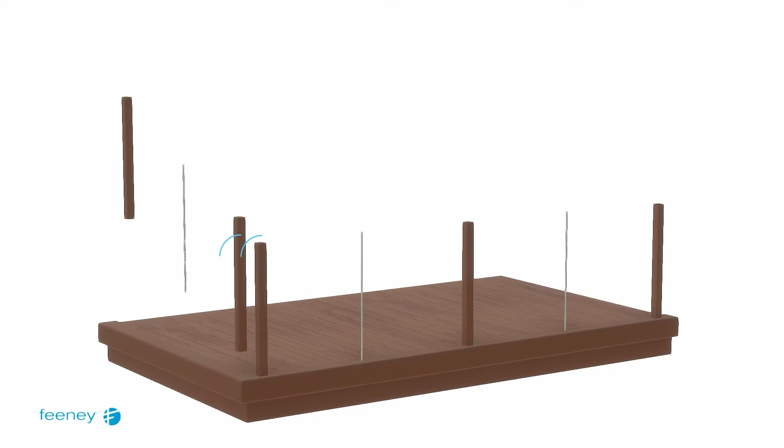In this video, we will walk you through the installation of Feeney CableRail Conceal Kits in a wood railing frame. Conceal Kits offer a sleeker, lower-profile alternative to our original CableRail kits. Here we have an L-shaped wood railing frame with double corner posts, wood intermediate posts, and Feeney stainless steel pickets.

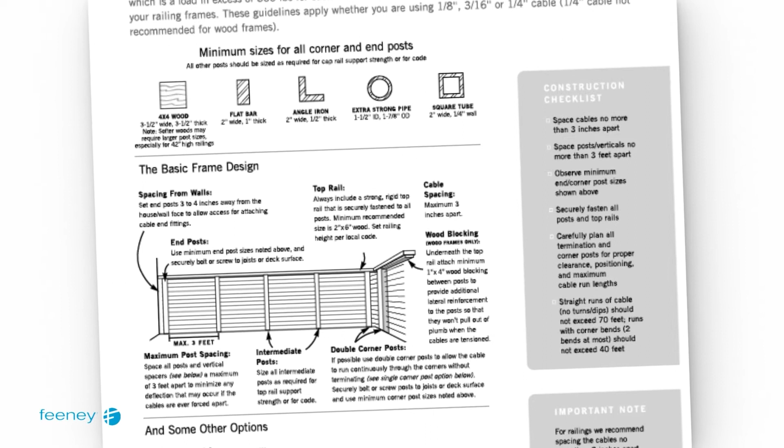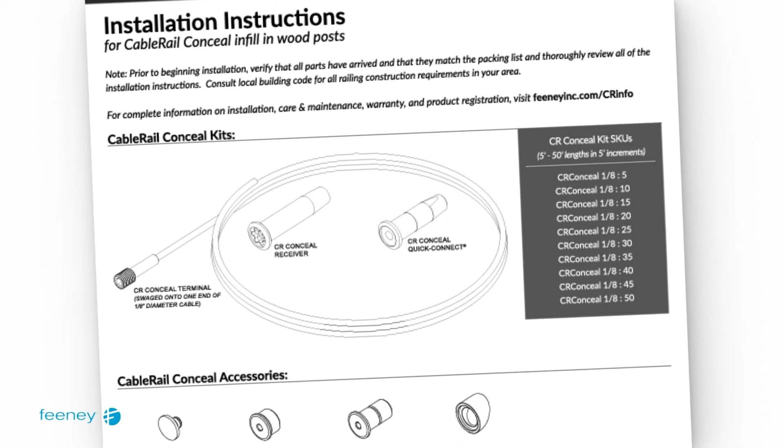Be sure to follow the recommendations on our website to ensure your frame is strong enough to withstand the tension loads of cable rail infill. Be sure to consult local building codes for all railing construction requirements in your area. Prior to beginning installation, verify that you have all the required conceal kits for your installation. Thoroughly review the conceal installation instructions before you start.

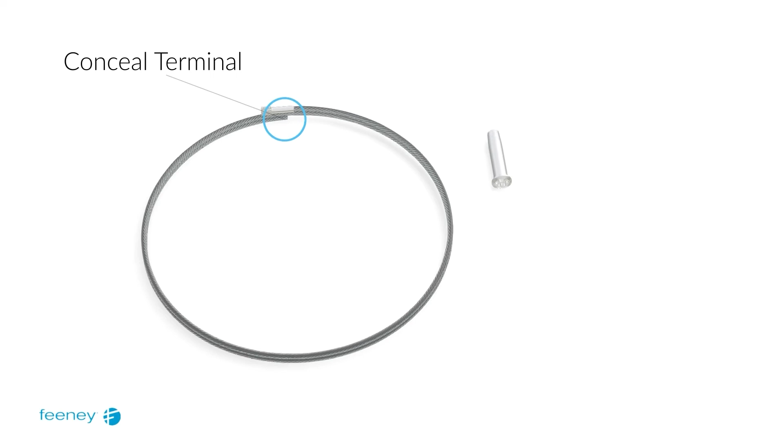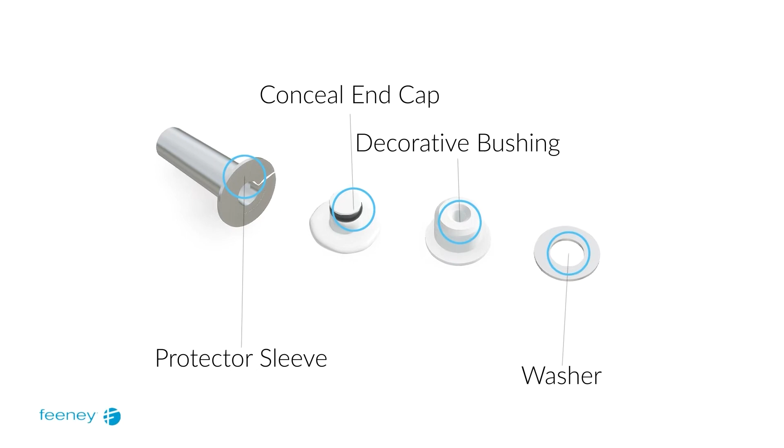Each CableRail conceal assembly includes a length of 1/8 inch diameter cable with a conceal terminal pre-attached to one end. The kit also includes a conceal receiver and a quick connect conceal fitting. You will also need stainless steel flat washers. Conceal end caps and decorative bushings are optional accessories. Your order may also include isolation bushings if your project is in a harsh environment.

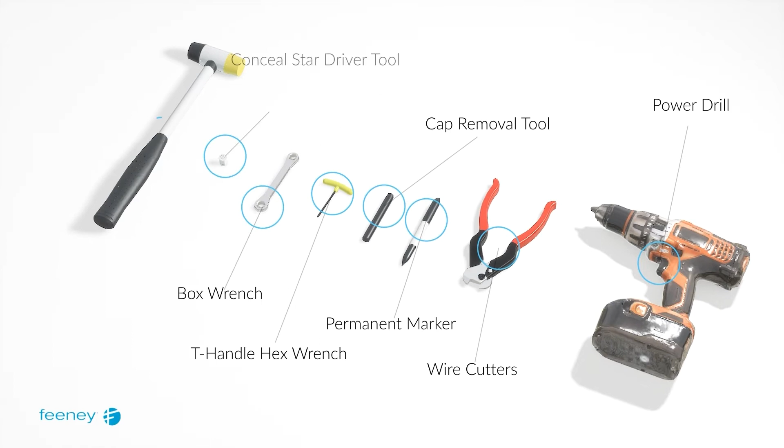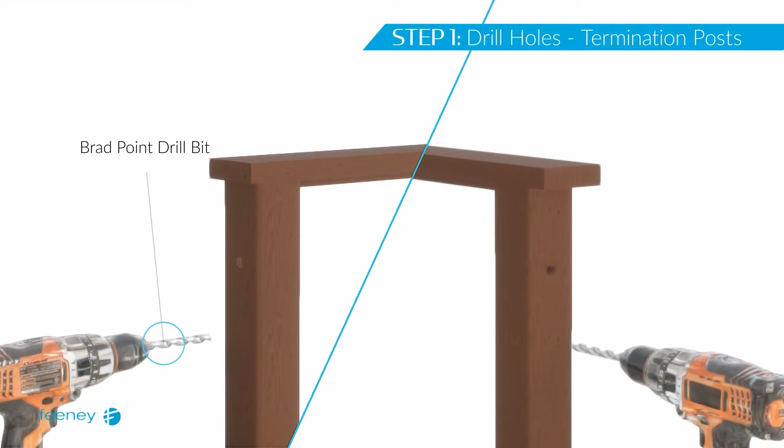You will need the following tools for your installation. Please note the conceal star driver tool shown has been specially designed for CableRail conceal installation. Drill 29/64 inch holes through both termination posts using a brad point drill bit. You can prevent tear out by drilling from both sides.

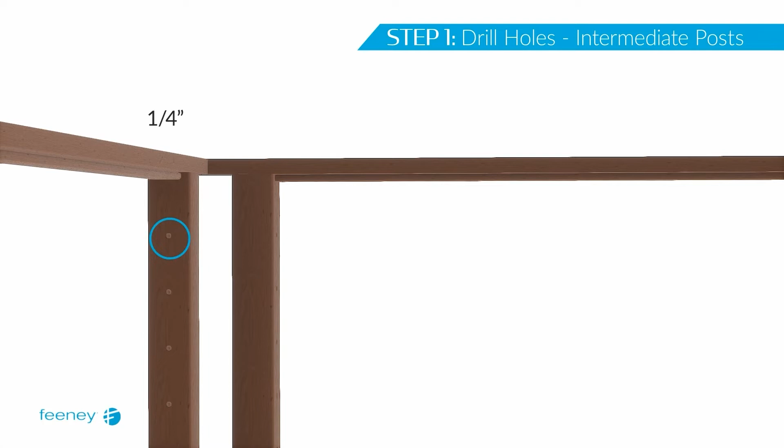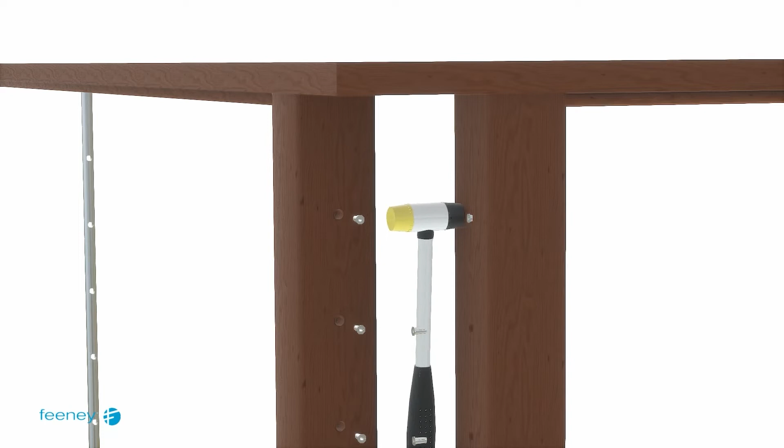Drill 1/4 inch diameter holes in the intermediate posts and 1/4 inch holes in the corner posts for protector sleeves. Feeney intermediate pickets come pre-drilled. If you are using protector sleeves, insert them into all holes now and tap them in with a mallet. If you are using decorative bushings, insert them into the holes on the inside face of termination post B. The decorative bushings for post A will be inserted later in the next step.

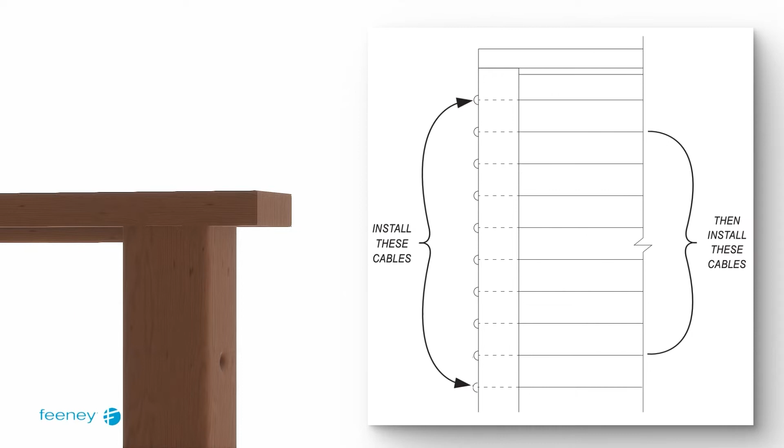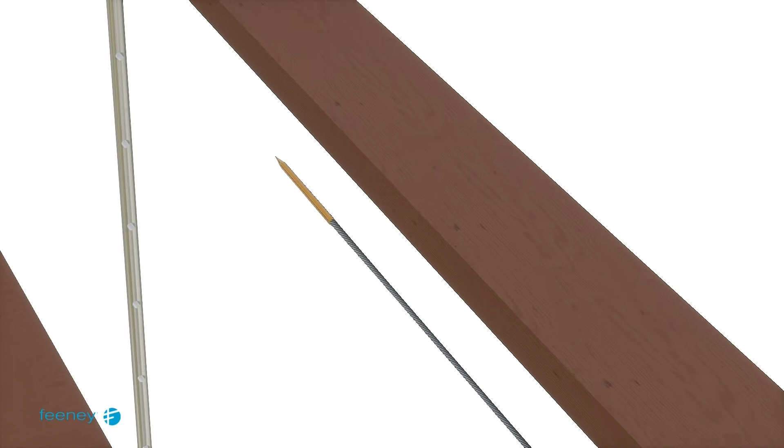Start by performing steps 2 through 12 for the top and bottom cables only. Once completed, repeat steps 2 through 12 for the remaining cables. This is required to preload the frame and ensures adequate take-up for all cable assemblies. Lace the free end of the cable through termination post A. If you are using decorative bushings, thread one onto the cable before continuing through the intermediate posts and pickets. We recommend using a Feeney cable lacing needle.

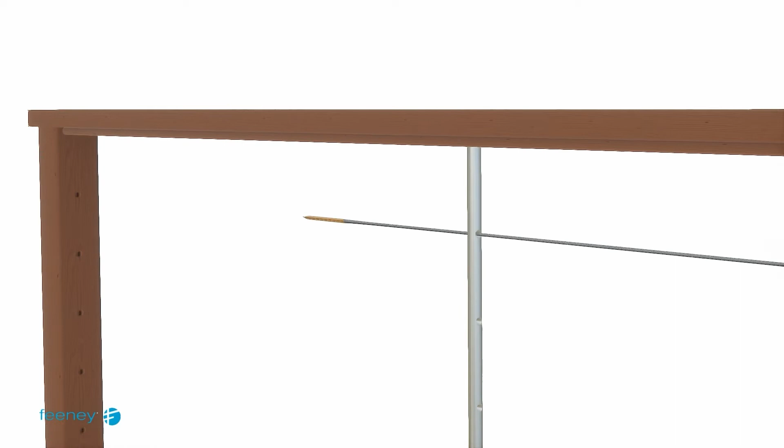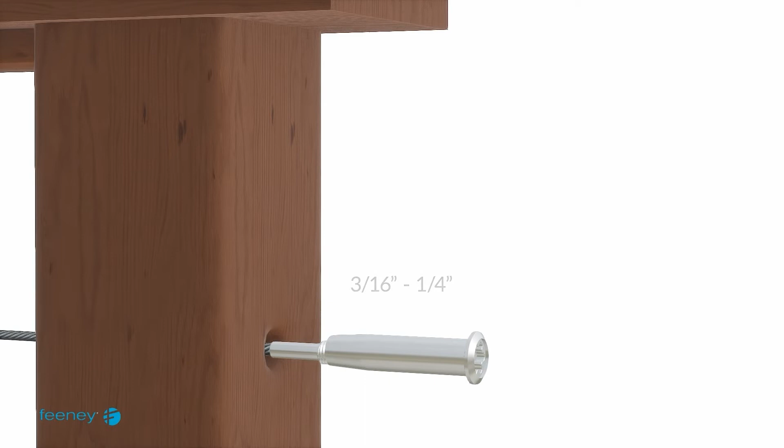Finish by lacing the cable through termination post B. Leave the conceal terminal exposed at one end. Thread the conceal receiver onto the conceal terminal, leaving approximately 3/16 of an inch of threads exposed. For cable runs over 40 feet, leave approximately 1/4 inch of threads exposed. Push the conceal receiver fully into termination post A.

Pull the cable tight through termination post B to remove slack in the cable. Mark the cable on the outside face of termination post B using a felt tip marker. Pull the conceal receiver through termination post A and unthread it from the conceal terminal. Use cable cutters to trim the other end of the cable at the mark made in the previous step. Reinsert the free end of the cable through termination post B, allowing 6 to 8 inches to protrude.

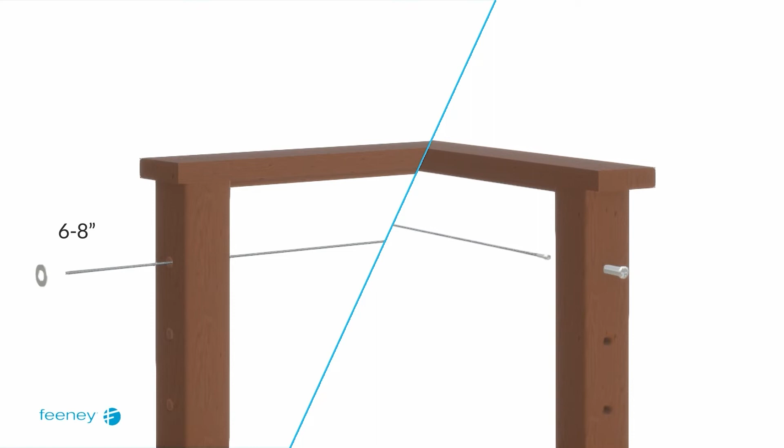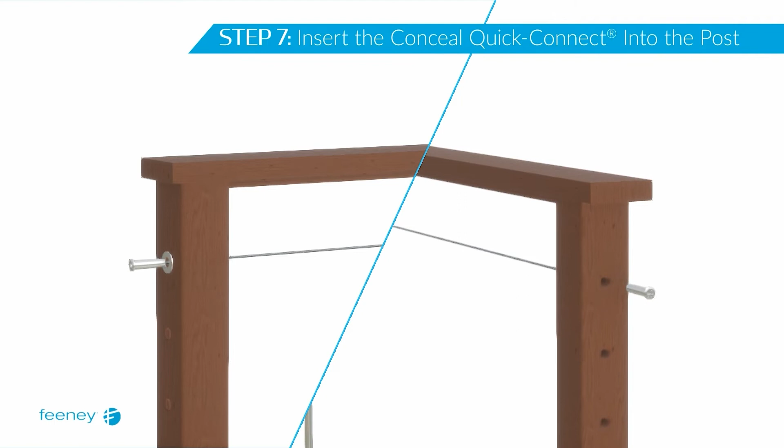Put a flat washer on over the end of the cable. Insert the free end of the cable at termination post B as far as it will go into the conceal quick connect fitting. Pull the cable assembly so that the conceal quick connect fitting slides back into termination post B and reinsert the conceal terminal into termination post A. Since the cable was trimmed, the conceal terminal will only insert partway into the post.

Slide a flat washer onto the conceal receiver and insert the receiver into termination post A, turning it clockwise to engage the threads on the conceal terminal inside the post. Continue threading the conceal receiver onto the conceal terminal until the receiver is up against the face of the post. You won't be able to see the fittings as you do this, so be careful to stop if you feel resistance to avoid cross-threading.

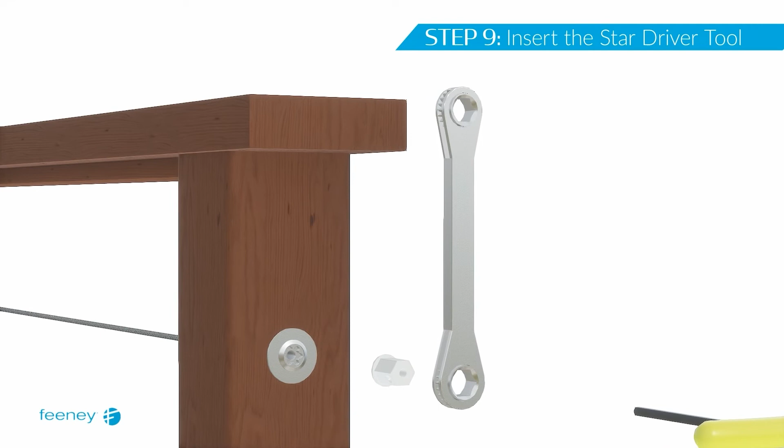We are now ready to begin tensioning the cables with the special CableRail Conceal tools. Insert the Conceal Star Driver tool into a 9/16 inch end on a ratcheting box wrench. Insert the T-handle hex wrench through the hole in the Conceal Star Driver tool and the conceal terminal. Engage the T-handle hex wrench into the mating hex end of the conceal terminal. Then align and fully seat the Conceal Star Driver tool into the star pattern on the conceal receiver.

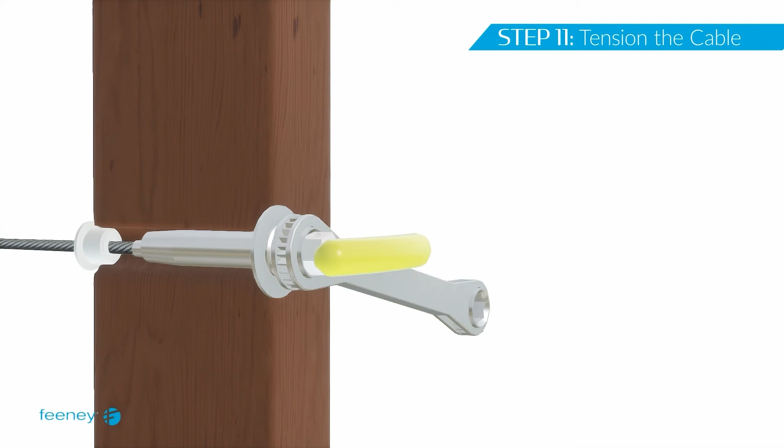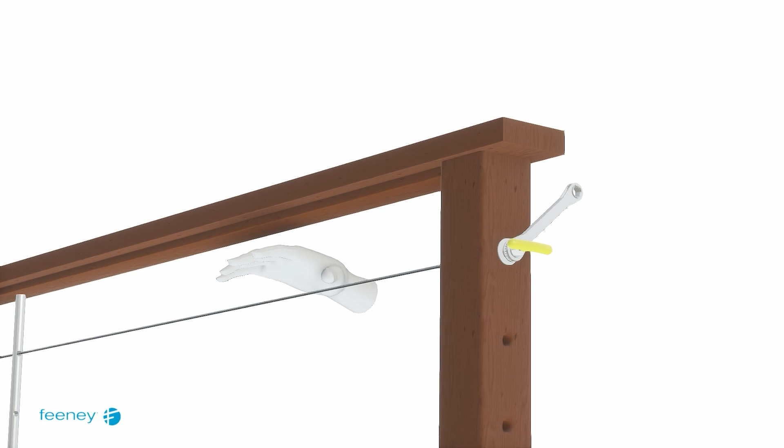Tension the cable by slowly rotating the ratcheting box wrench clockwise while holding the T-handle hex wrench in a fixed position. After the slack in the cable has been removed by initial tensioning on all cables, swiftly hit each cable line with your palm several times to ensure that the jaws and the quick connect are securely seated. Continue tensioning each cable until the desired tension is reached, but take care to avoid over-tensioning the cables.

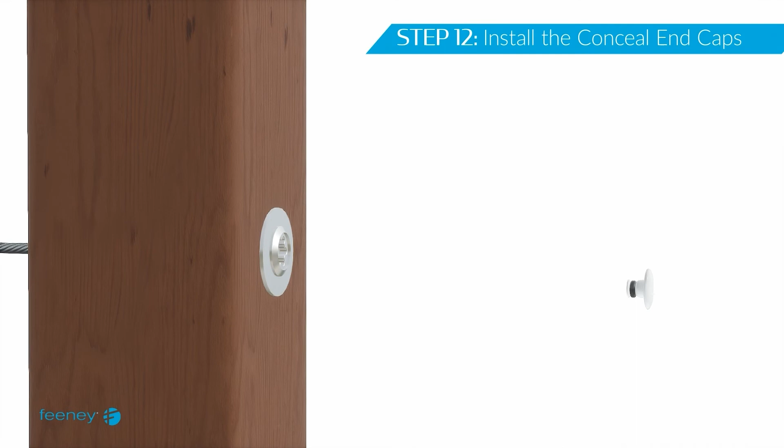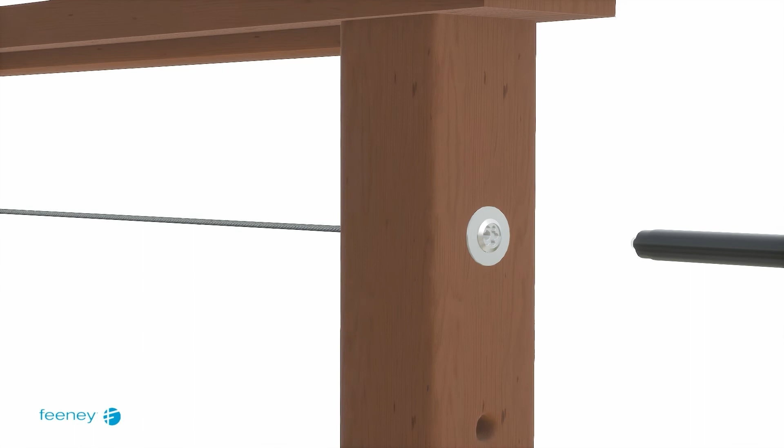Once the desired cable tension is reached, the conceal caps can be placed into the conceal terminals and the conceal quick connect fittings. The rubber O-ring on the conceal cap may require lubrication. You may use soapy water. If retensioning is required in the future, use the cap removal tool and repeat the tensioning process. Now repeat steps 2 through 12 for the rest of the CableRail Conceal Kits.